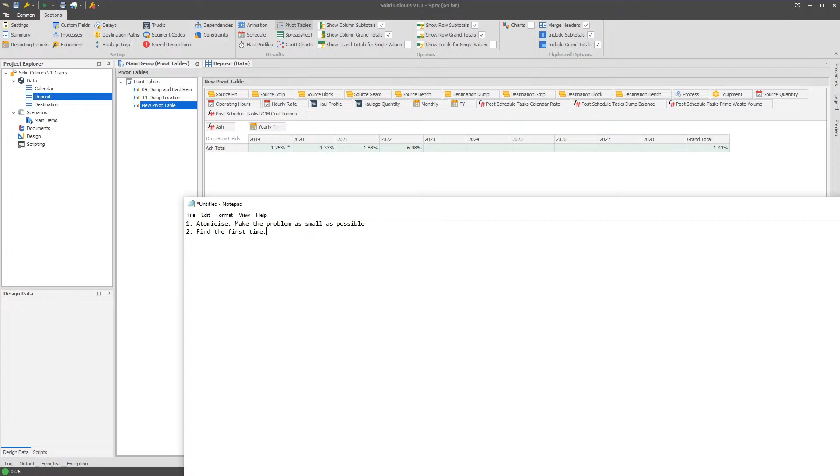So what I want to talk about is, if you've got a problem, the first thing I want you to try to do in Spry is break it down to the first time it happens and the smallest possible example of how that happens. And there's two reasons for that. So we've got atomicise. I started writing know the right answer, but I'm changing my mind. Atomicise and find the first time. So make the problem as small as possible. So I'm going to say that this quality that I'm interested in is too low, right? And I already know the answer.

I've made this problem. But one of the things that you can do from, say, a pivot table or even a spreadsheet is you can try and find the actual output schedule. So for all of the results in your Spry models, the troubleshooting process generally starts at the output schedule. The output schedule will show you the first time something happens. It'll let you sort things by date. And what I want you to focus on is, and I know it's hard because when you're in the middle of a problem, you're looking at it from a high level, take that problem and first make sure that it solves for an individual line of the output schedule, and for a handful of them that you know how they should work out.

And what I mean by that is, for any individual problem, if I know that x plus 1 equals 3, then I can work out that x is 2, right? But if I have multiple lines and I'm looking at the sum of all of these, essentially a series of very basic algorithms, you need to be able to say, well, I'd expect for this line of the output schedule for my x to be 2. But my x is actually showing up as 1.5, and you can go, okay, why is x coming out as 1.5? And it allows us to break it down.

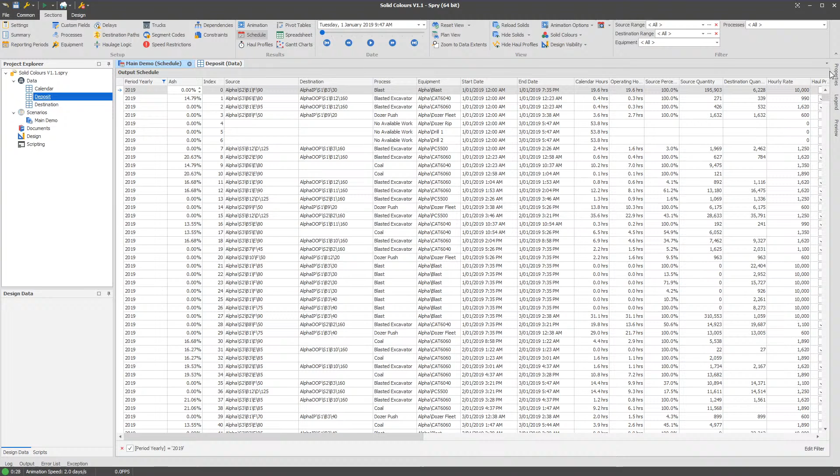So the first thing I want you to try to do when supporting yourself, and even if you get stuck here, this is not the end of it, this is just how you can help yourself, is to look for the problem on an individual line of the output schedule. And oftentimes the easiest way to do that is to get your schedule open on one screen, your animation open on another, and to go, okay, that number is correct based on my back of the envelope, what I expect.

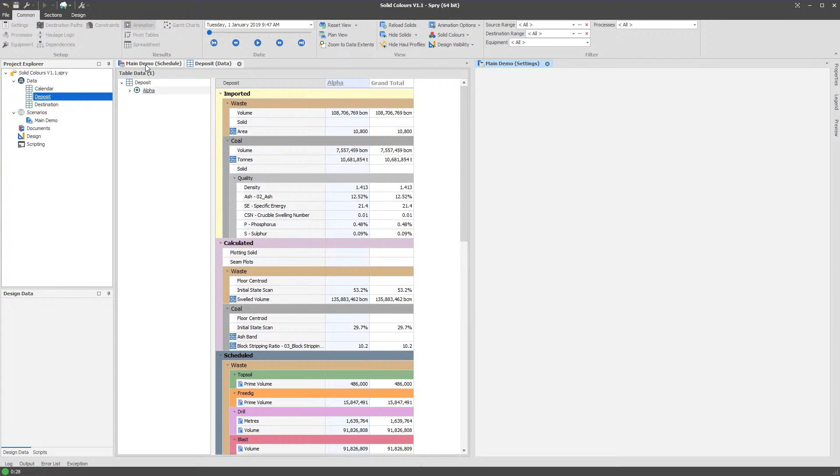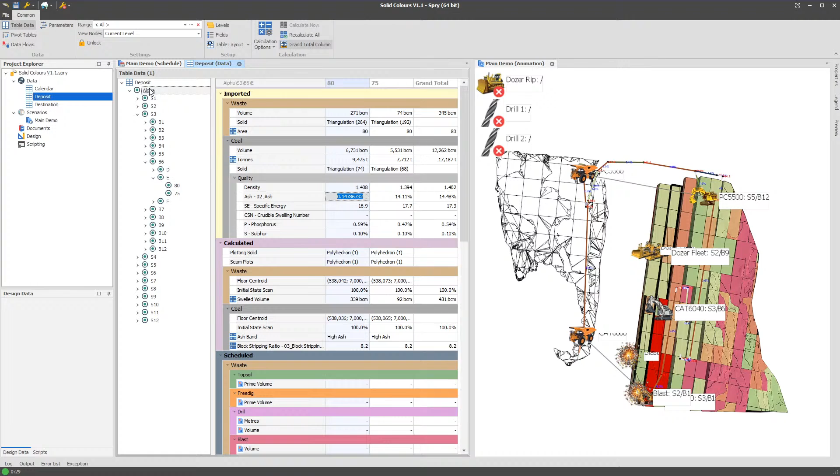If I add these numbers up, that's what I would expect to get. So if I go looking for my coal, I'm expecting this is showing 14.79%, and this is an ash field. If I right click on that, I can go to the record on the table. Breaking it down to a small number, I can see that it's also 14.79, which is what I'd expect. But if I step up to the top of the table, my average ash here is 12.5%.

If I go back to my pivot table, my average ash is 1.4%. That's not right. So this is where it's not right at the high level, but it's right at the individual level. Maybe already at this point you've found the answer, you've realized something's not right. On top of this, you need to start saying, okay, I've found the smallest version of the problem, and maybe the smallest version is okay, but at a larger level it starts to be wrong.

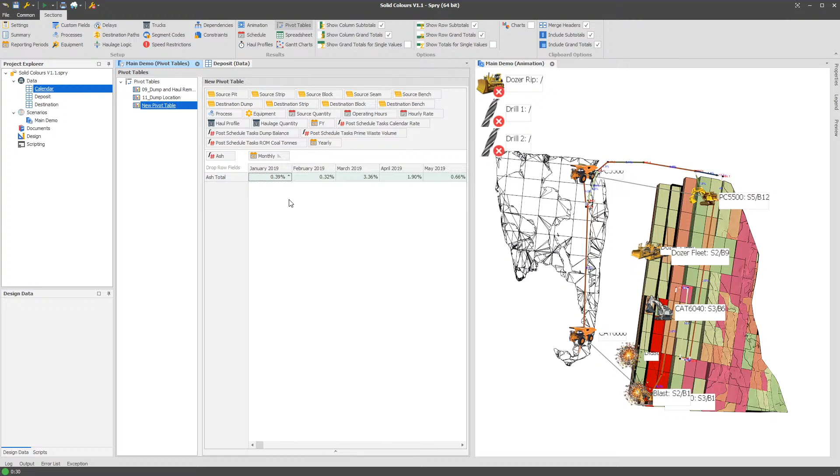So there's multiple ways to address this. You can use calendar tables to help you write back average results. That can help you aggregate to a certain level. Or what you can do is, if we look at it on a monthly level, say okay, that number's too low. Once we've atomicized, we can start to spread it open a little bit. As long as you're not looking at too big a list, you can start to eyeball these, and do the problem solving on maybe a slightly larger group. You may need to start expanding your mindset into thinking about things that shouldn't be returning a result.

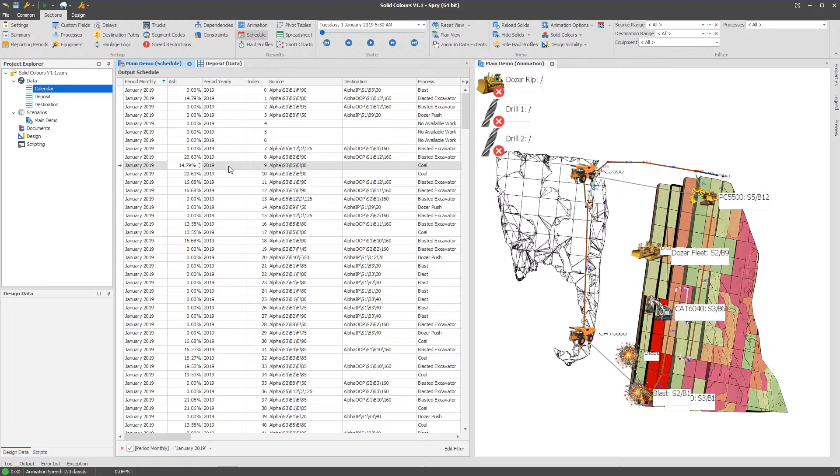But if you can break the problem down to a smaller problem, the output schedule is one example, then that's going to be quite helpful. Now, your numbers might be calculating fine, but you're saying, actually, my excavators are in the wrong location. You can see this, it gets stuck and doesn't move, or doesn't do what it's supposed to do. Once again, the solution to this is the same, the concept is the same, we just use a slightly different tool set.

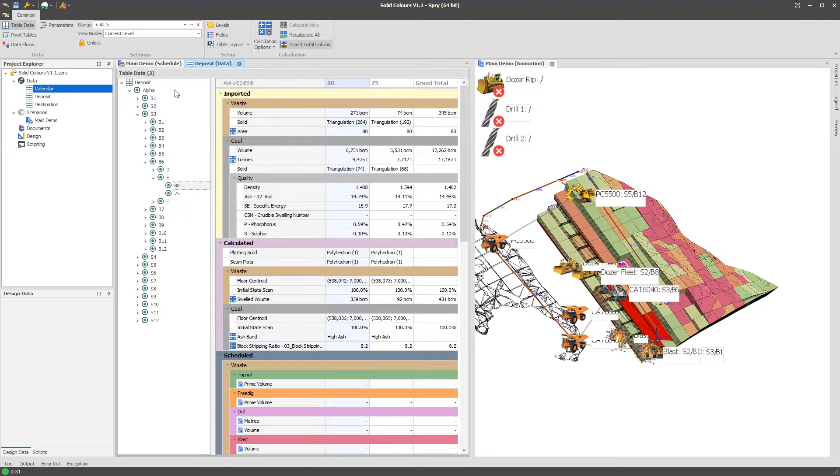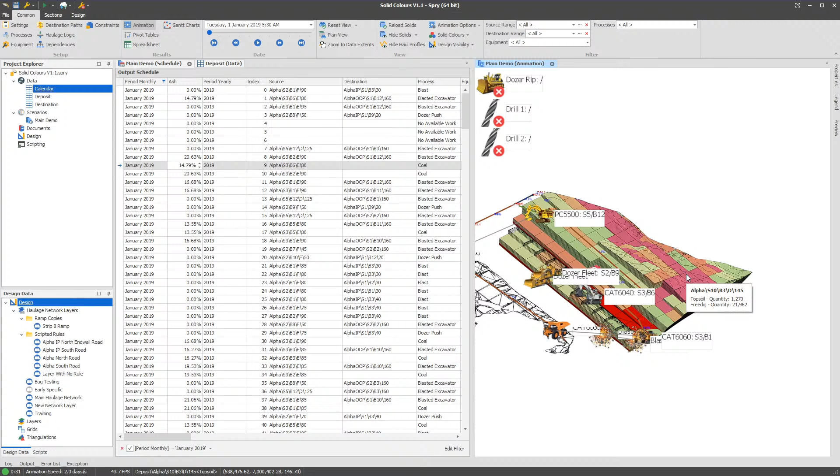So when we're talking about supporting at an atomicized level, down at the atom, we're looking for a node on the output, a node on the deposit table or calendar table or destination table. We're looking for a single line of the output schedule. Oftentimes we've found the answer at this point when it's about reporting. Or if we're talking about the behavior of the excavators from an animation perspective, like at the start of the month it stops doing this, or starts doing that, or it's not going here or there, what you should be doing is saying, when's the first moment that behavior is wrong, roughly.

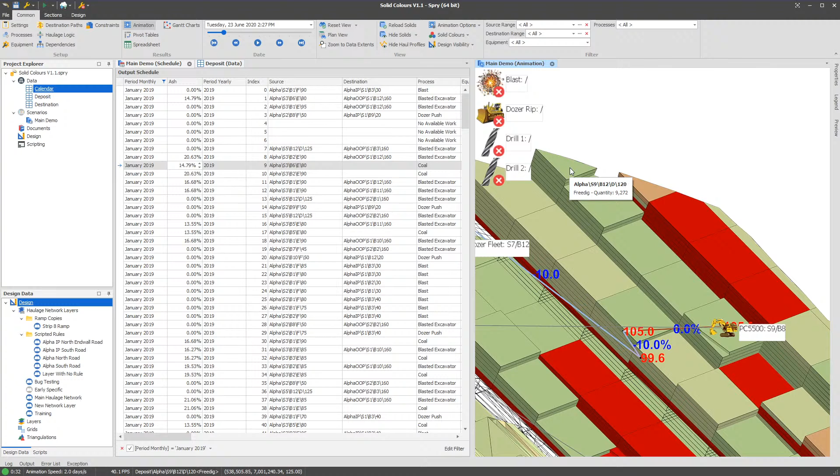Because once again, to atomicize an issue like, why is my PC5500 on this block 8 instead of being on block 12, the moment that it starts working on it is probably the moment you're like, okay, right there, that's when it should have been over here. That's you atomicizing the problem, that's you making it very specific. You're not looking at the overall behavior of all of the equipment on the screen.

If you can try and break it down to, okay, when's the first time one piece of equipment is not doing what it's supposed to be doing, then you can use the tools that Spry's got to help you solve the problem. It's a really common one as well, like why is this block not getting dug, or why is this here instead of there. This is the second main component of self-support.

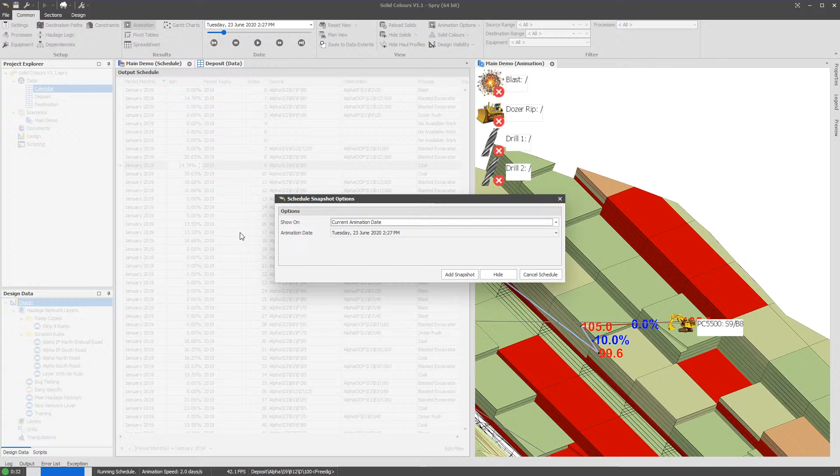So we've got the output schedule for when your results are just adding up wrong. And then if the behavior of the excavators and the behavior of the schedule itself is wrong, the snapshot viewer is the other half of that component. If you've got the animation date set, you get the current animation date, which allows you to get to that exact moment of the schedule. You'll get the snapshot viewer.

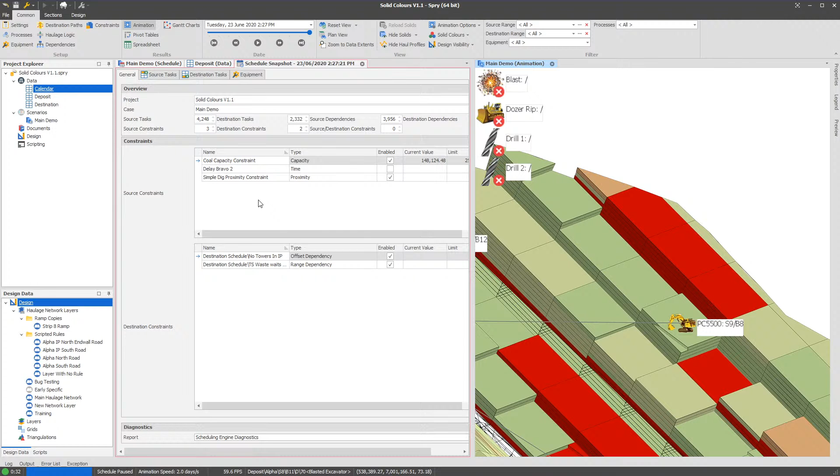I'd often recommend, if you're talking about behavior, you put the animation and the snapshot together. We've talked about the snapshot viewer before, but once again, it's about coming down to and breaking it down to, okay, it's not the 6060, it's not the 6040, it's the PC5500. Why is it on an individual task? What you can start to do is say, the reason why it's on this task is for XYZ. It might be that either the paths are around the wrong way, which you'll see immediately. You should be able to see that the first thing in the list means it's doing the first thing it wants to do.

It's doing exactly what it's supposed to be doing. You might be able to then go, well, okay, why are you not doing this? And you can go and find that it's number 8 in the path, not number 1 in the path. It might be on top of the path.

It might be number 1, but it might be unreleased or constrained. That process will solve about 90% of the support questions we get over the phone, just by breaking the problem down to the smallest possible level. It's because when you're looking at these problems, you're looking at them from a high level, thinking about the mine and how it behaves holistically, or on a monthly or yearly basis.

But all of these bigger problems often stem from small individual problems, and oftentimes going to that atomic level, solving the one little problem, will unlock things. You're not just solving it for that one moment in time, you're often solving it for the rest of the schedule.

So that's the basics of it. It's a little dry, but it's super important. If you can pick up that thought process, think about the problems at the smallest possible level. Solve one small problem first, just try to solve the smallest problem.

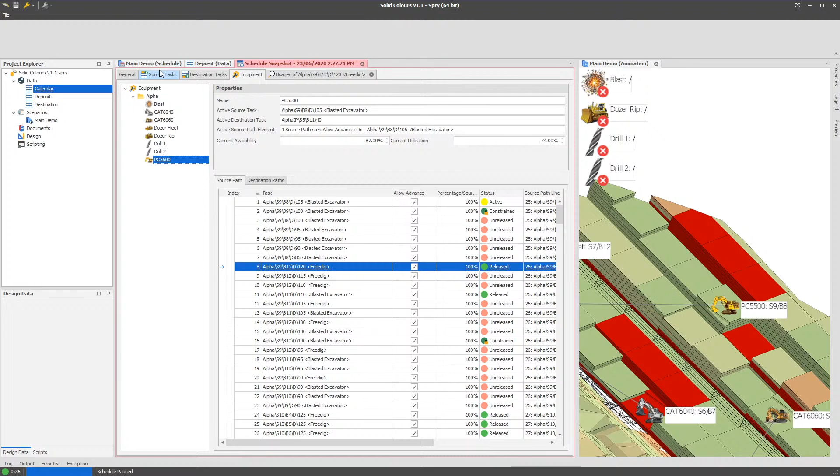I did miss something. For those of you who've managed to stick around to the end of this pretty dry one, I missed something in the new release, which is that you now have the ability to take your columns and format them. So conditional formatting, you can highlight. If I want to say unique values, make them bold. Nothing's unique in this list, everything gets shared. I might go with something like highlight equal to coal, and give it a red fill with red text.

Oh, the snapshot viewer might be getting in the way of that, actually. We lock a lot of things down when the snapshot viewer is open. Let's try that one more time. Conditional formatting. Process equals coal. Doesn't work with the snapshot viewer open. We probably need to make a quick tweak to how that works.

If you're exporting this to Excel, actually I haven't tested this yet, but I'm reasonably sure that if we spit that out to Excel, we will also get that formatting coming across too, which can be nice. It'll load up automatically, let's let that load. Maybe it won't. Let's fire that up.